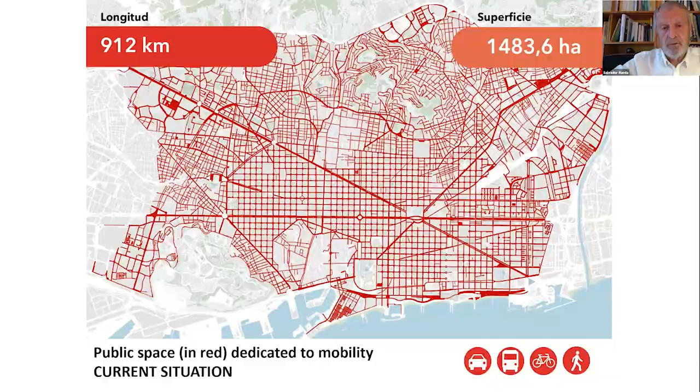This is the proposal approved by the plenary session of Barcelona City Council, based on superblocks, where we will free up practically 70% of the space that today is dedicated to mobility. And we're going to do this without compromising, without putting at risk the functioning and the organization of the city, given that we can free up 70% of the space simply by reducing traffic by just 15%. With 15% less traffic, we achieve similar traffic service in the city to current traffic service. That is, the speeds on these routes in red will be similar to those in the current situation.

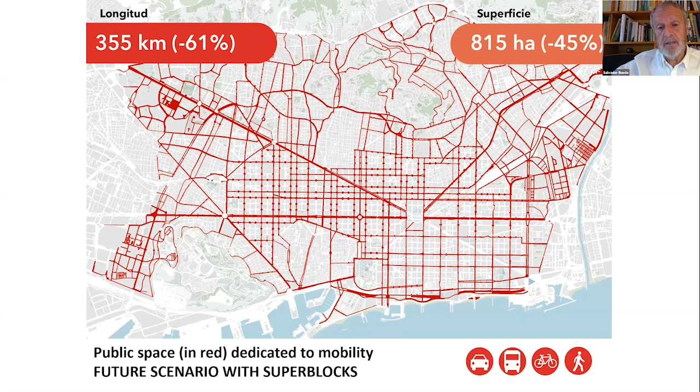So this is the proposal for Barcelona, and as you will see, we will define a similar scenario to transform cities throughout the world, because this is, as far as I can see, the most efficient model known to us at the moment in terms of freeing up space compared to the number of vehicles that you need to reduce to achieve it. Like in Barcelona, a proposal was made in Madrid and was approved by the Committee for the Reconstruction of the City of Madrid during the pandemic. It's a proposal of superblocks that we defined in the Madrid Center project. Within the black lines, you have about 2 million people living.

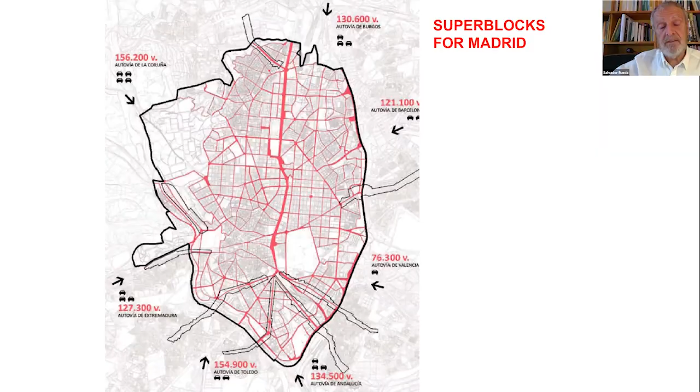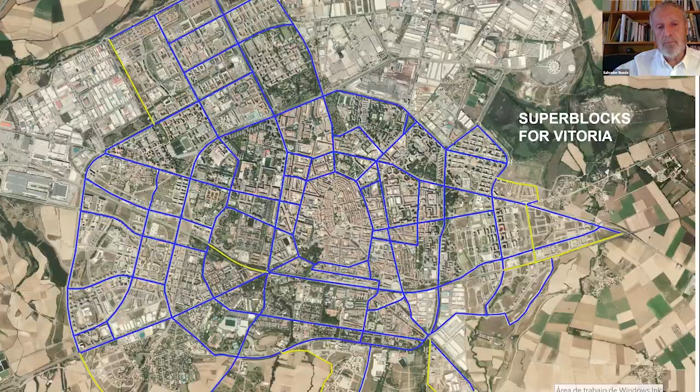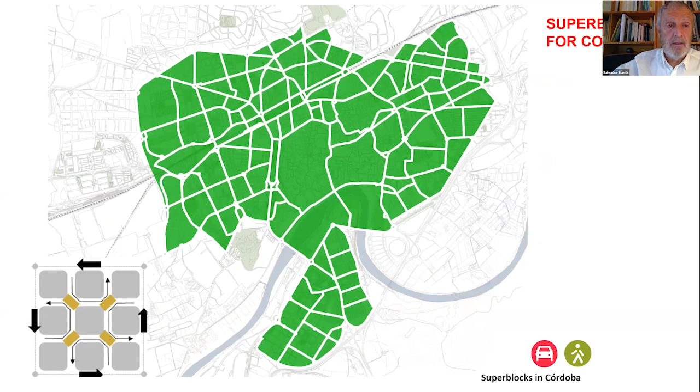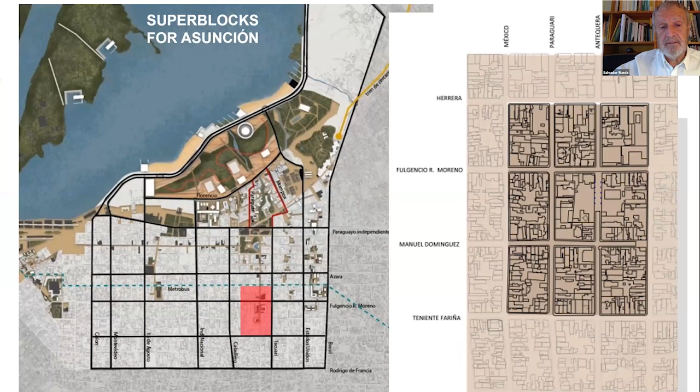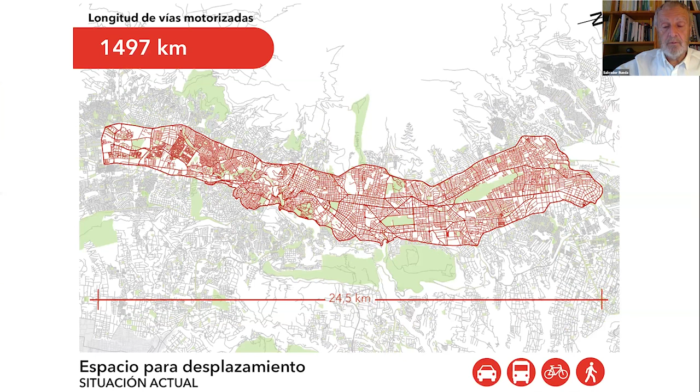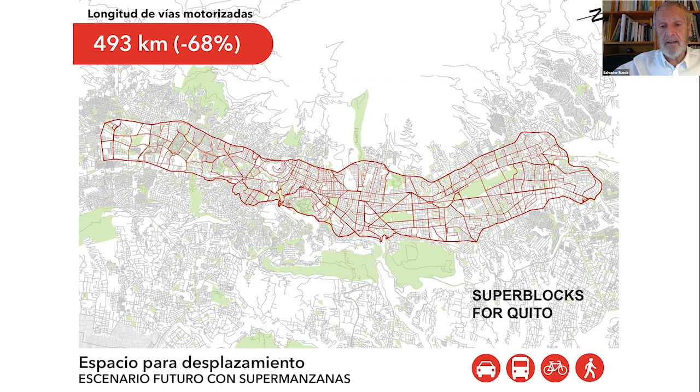So what you can see here are morphology cells that define the different superblocks based on the morphology of each place. In fact, we can talk about superblocks constituting a model. It's a model because it can be repeated in other places in the world, and why not in Wellington? Now we'll see what the aim of this proposal is.

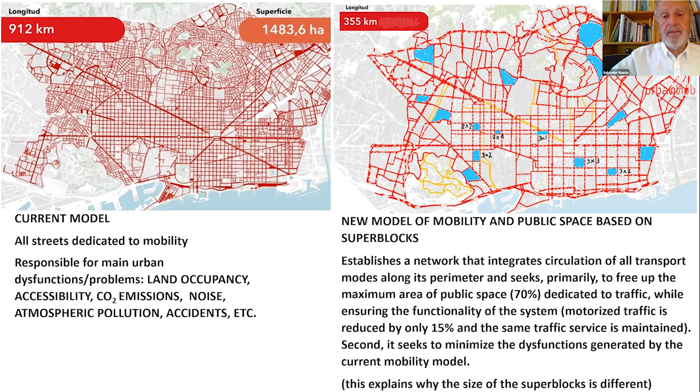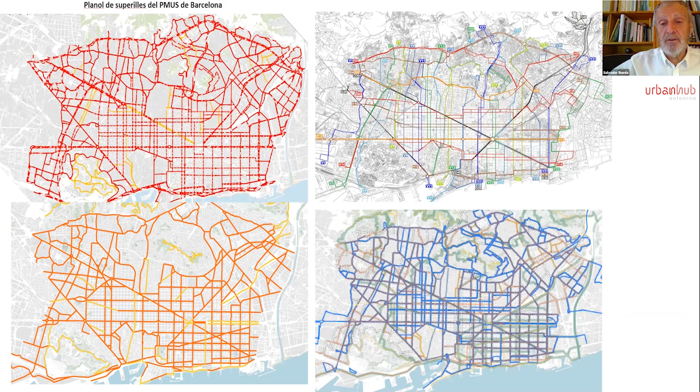So this is the drawing that I did in 2002 for the definition of the new network of buses, the new orthogonal network. This network has already been built. Implementation was completed in 2018. And I can say that I was looking, because I'm also a psychologist, and all my projects first look at how people behave in relation to the proposals that we're putting forward. Here, the idea was, with the same number of buses, to achieve waiting times at bus stops that were as short as possible.

In fact, the human brain begins to have the feeling of waiting when the waiting time exceeds 2 minutes. So under 2 minutes, it's as if you weren't waiting. So we need to look for a network where the frequencies are around 4 minutes, so that the waiting times are 2 minutes, so people don't have the feeling that they're waiting. And this allows you to multiply the number of users of the new network. In fact, before the pandemic, the increase in users was more than 15%, and that's many millions of new users.

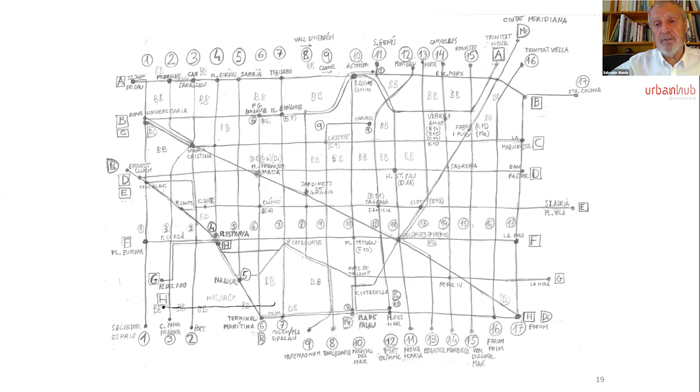In the case of Vitoria-Gasteiz, we implemented the new network with these criteria, and the percentage of new users from 2009 was more than 100% with the new network. And also we have the bicycle network. So we're looking for interconnection, intermodality between modes of transport. When somebody asks me in Barcelona, what is the vehicle of the future for the city of Barcelona? The electric vehicle? I say the electric bicycle. The electric bicycle in a city arrives at its destination before a car when the distances are under 11 kilometers.

So I'll get there more quickly on the bicycle than by car. And the energy I need to reach my destination, to do that journey, is less even than the energy that I'd use to do the journey on foot. So the sum of the metabolic energy plus the energy of the bicycle motor is less than the metabolic energy that I need to do the same journey on foot.

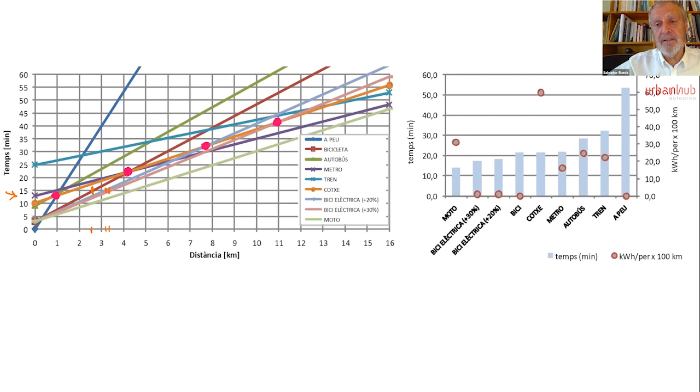The car can't cross the superblock, and that's the key. So you can get to your destination if your destination is inside the superblock, but you cannot cross it. And as a result, 95% of the trips that used to be made in this area just stop happening because the destination is not inside the superblock. So it's stupid to go in, because they're not going to allow you to cross it if your destination isn't inside. On the other hand, pedestrians and cyclists can cross it in both directions.

And there's also a key restriction to all this, which is that the speed inside the superblocks cannot exceed 10 kilometers per hour, to make it compatible with all the uses and rights of citizens. So we're trying to achieve that a blind person could walk along the middle of the street without fear. When we propose mobility solutions at 30 kilometers an hour, that means that out of every 100 accidents between a person on foot and a car, 5 of those people will die. So it's not compatible with the street being used by a child playing with a ball or on a bicycle.

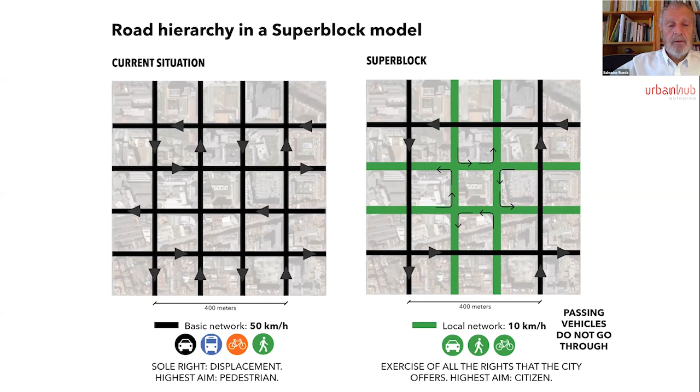As I said, on the left we have the thoroughfares in black for circulation, for movement, in green on the right-hand side for communication. So 70% of the space is freed up for contact between people. But perhaps the most radical thing about the proposal, and when I say radical, I mean going to the root, is that at this moment, the maximum aspiration of planners is to transform urban fabric into pedestrian areas, without realizing that a pedestrian is just another mode of transport.

We're always talking about mobility, but when we talk about transforming public space today, we're still thinking just about mobility. What do we do with bikes? What do we do with pedestrians? What do we do with public transport? What do we do with cars?

And no, what we're proposing is the system on the right-hand side, and that is that in the interior of the superblocks, as well as the right to movement, you can exercise other citizens' rights related to entertainment, leisure, exchange, markets, culture, art, knowledge, and the consideration of public space as an agora, a space in which to develop democracy, democratic expression in all its senses, as well as the right to movement, particularly movement on foot or by bicycle in active modes. This is the arrival of the Superblock proposal.

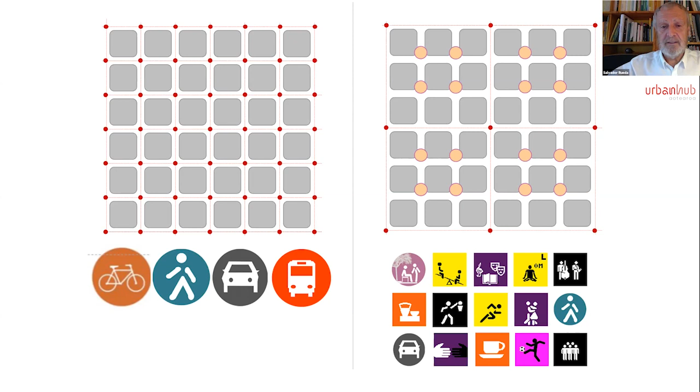So think about where we've come from and look at where we want to get to. This really is the biggest recycling project in the world, because we're freeing up practically 7 million square meters, and without tearing down a single building.

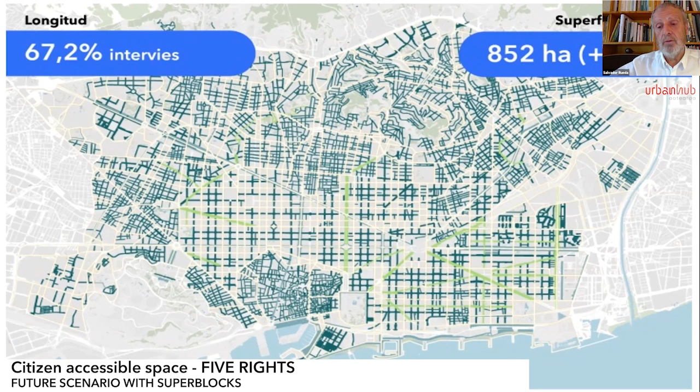Or in the case of Barcelona, these green points that you see on the Cerdà expansion, these are future squares. Today they're intersections, like the ones I showed you before in the first and second photograph, where you see a kind of octagon full of asphalt. But look what we can do if we carry out the Superblock proposal. And I insist, without tearing down a single building, we can achieve 163 new squares like this. You see?

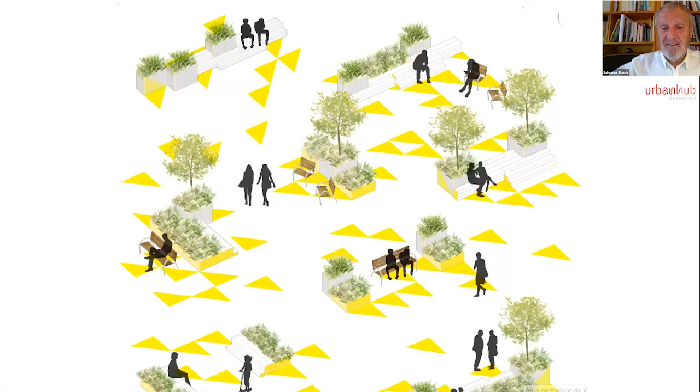That's a living space. It costs very little. These are all recycled materials. It's a 2,000 square meter square, where in a standard superblock you'd have 4 squares of this type. So almost 1 hectare near your home. I mean, it was unthinkable before, a project like the Superblock project. This is another one with a more structural, more finished urbanism, and in the end, you end up with a green network like the one you see here.

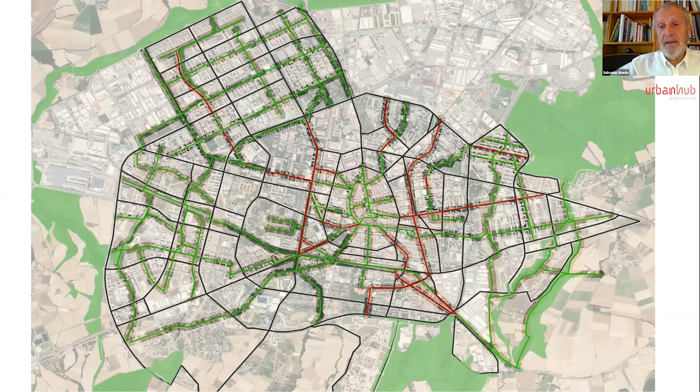In the case of Vitoria-Gasteiz, we have this new network where we're already working on 2/3 of the city to transform it into superblocks. But one of the elements we're looking for, as I put forward in the definition of the model, is improving habitability. So reduction of the dysfunctions that we suffer from the current mobility model.

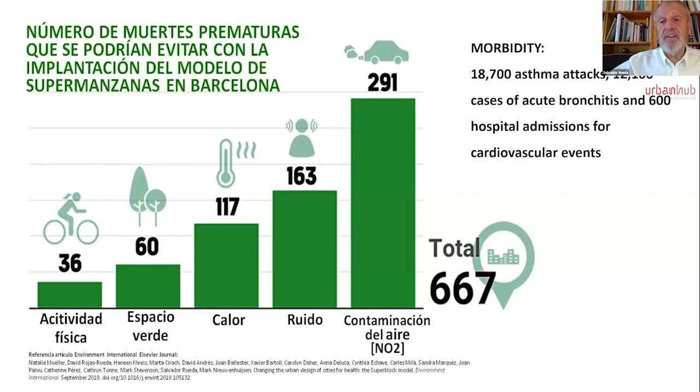So what you see here, you can read this in the Environment International Elsevier journal. This is where we did some research between one of the biggest epidemiological teams in the world, together with different European and American universities, as well as the Urban Ecology Agency of Barcelona. So in Barcelona, we were able to prevent 667 premature deaths just by implementing the Superblock model. That's 291 due to air pollution, 163 due to noise pollution, 117 due to high temperatures, heat, etc.

So it's irresponsible not to put forward projects of this type, because people are dying, and they're not just dying, but there are problems of morbidity, health problems, and these include 18,700 asthma attacks, 12,100 cases of acute bronchitis, 600 admissions to hospital with cardiovascular problems. So all of this could be avoided or prevented with the Superblocks proposal. And in economic terms, we're talking about a saving of 1.7 billion euro.

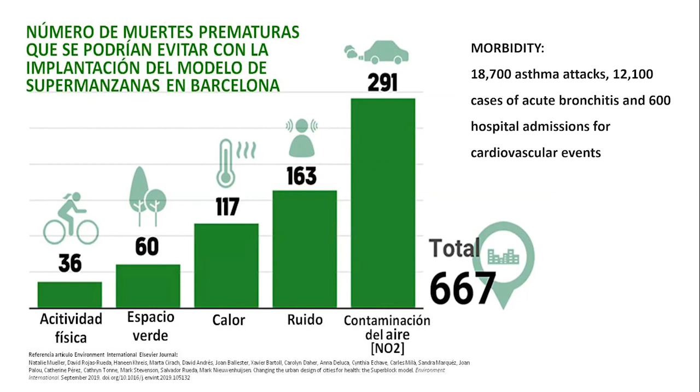Now, with the Superblocks, on the other hand, only 6% would be living in a space with unacceptable air quality, and 94% would not. In the case of noise pollution, it's not quite as spectacular, but the data are similar. In this case, 75% of the population would have noise levels below 65 decibels, which means that two people talking 1 meter apart would be able to communicate 100% of what they're saying in an intelligible manner without needing to raise their voice, without shouting.

And temperatures as well, the heat island effect. At the moment, we have 96 nights with temperatures all night above 20 degrees centigrade, and 21 above 25 degrees. That's insane. Many people die, vulnerable people, the elderly, people with respiratory or cardiovascular problems, and children have severe problems, and some of them die.

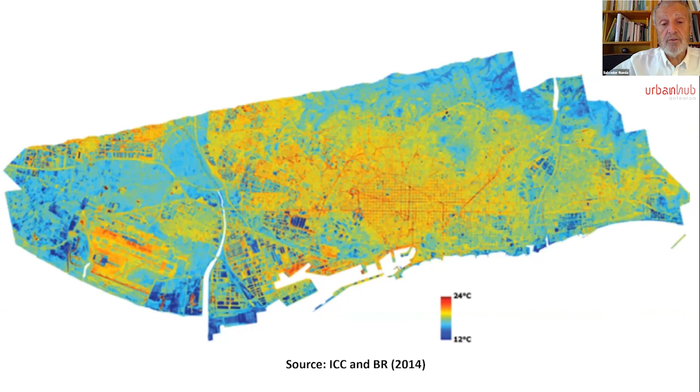So we would develop a green carpet on rooftops, which would allow us to reduce the temperature by between 3 and 4 degrees and reduce the heat island effect. And this increase in temperatures caused by the heat waves due to climate change.

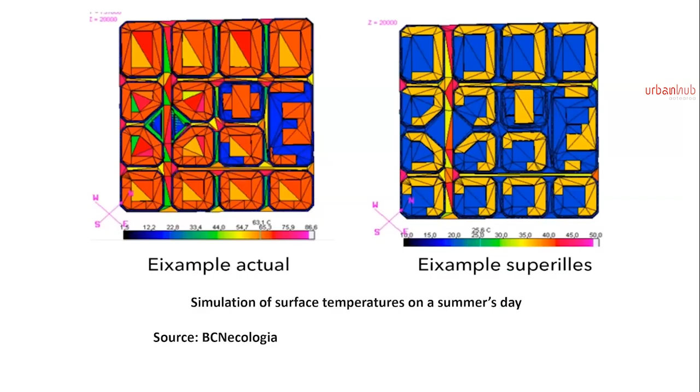This is the simulation. On the left-hand side, we have the current situation. On the right, we have the Superblock situation. So this is the surface temperature of materials. And on the right, with our proposals, in terms of permeability, including several green layers, and this green carpet we were talking about just now, in the end, temperatures will be reduced and the temperature of materials is reduced.

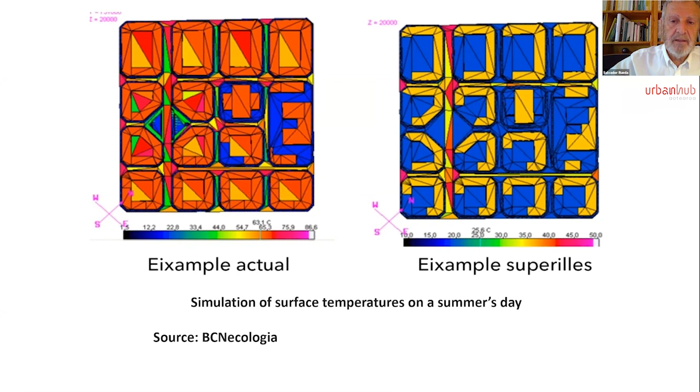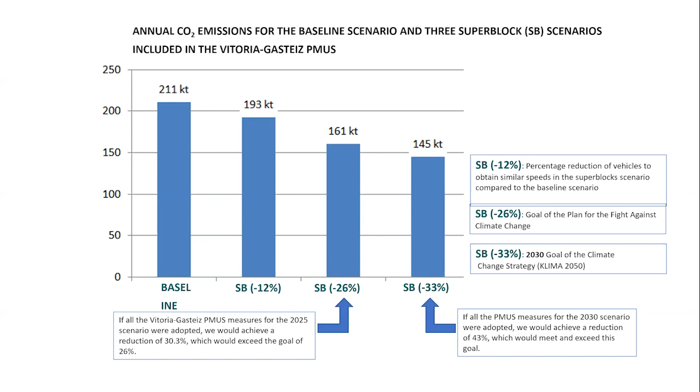Another fundamental element that is part of the Superblock proposal and of the compact and complex city model, which is a model that was approved at the Quito Summit, the UN Habitat Summit. That's a model that, in a way, I proposed, and United Nations has taken it on board. And it's a model of a city that's compact in its morphology, complex in its organization. There's a high mix of uses, and it is also metabolically efficient and socially cohesive.

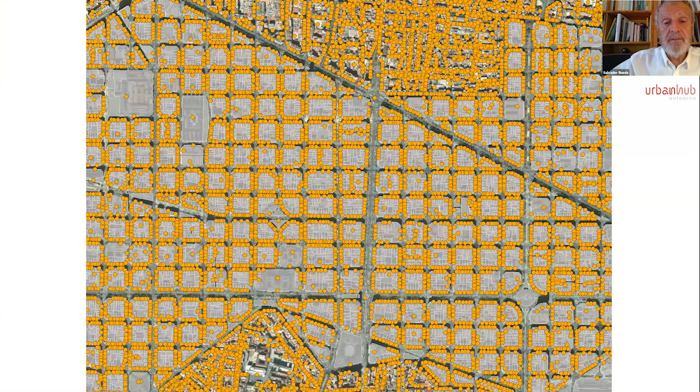And what I'm going to do is transform these orange dots into icons, into ideograms, similar to Japanese or Chinese language. What we're going to achieve here is a message about that area. A message where I can measure the level of information in that message based on information theory. Similar to the way you measure biodiversity, I can measure diversity and therefore the level of complexity of urban organization using that theory. So this is using the Shannon and Weaver formula, which is the measure of entropy, to measure the information contained in the message we talked about just now.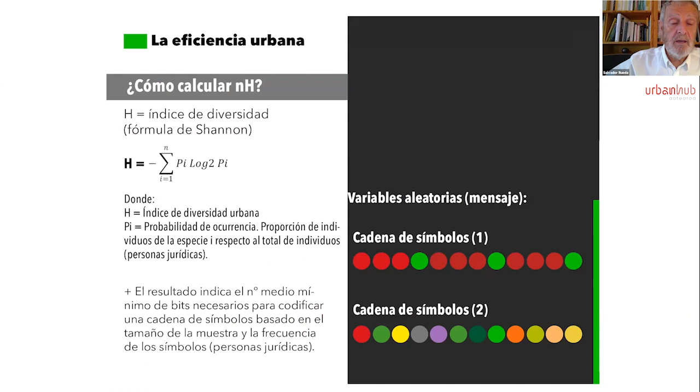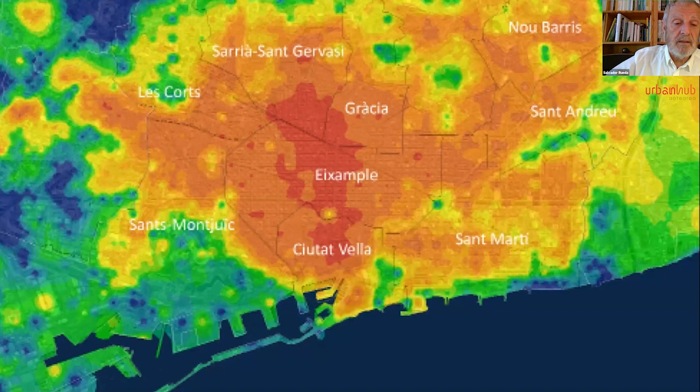And we have developed a dictionary in order to read the city, a dictionary of more than 2,000 words, which allows us to create messages and understand the level of centrality of each piece, the level of maturity, etc. Okay, so this then gets turned into maps like the one you can see here, this map of Barcelona, where you can see the levels of diversity and therefore the levels of organizational complexity and centrality. This is the same, but with density of activities.

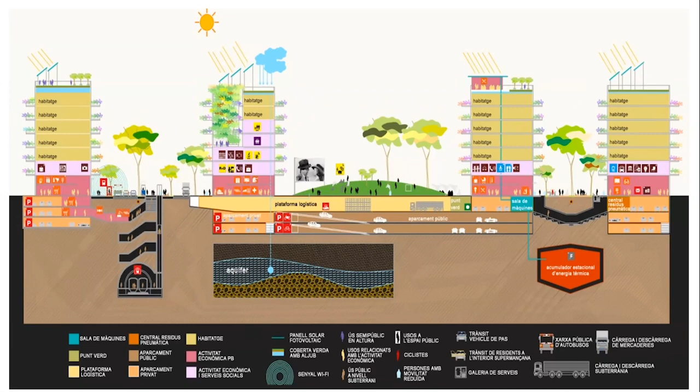In the superblocks, in ecosystemic urbanism, we work on 3 levels: 1, at a height on rooftops, 2, on the surface, and 3, underground. So we need to link all 3 if we want all variables to be integrated, so that we can take on the major challenges facing humanity and to have cities that will be responsible for their current impact.

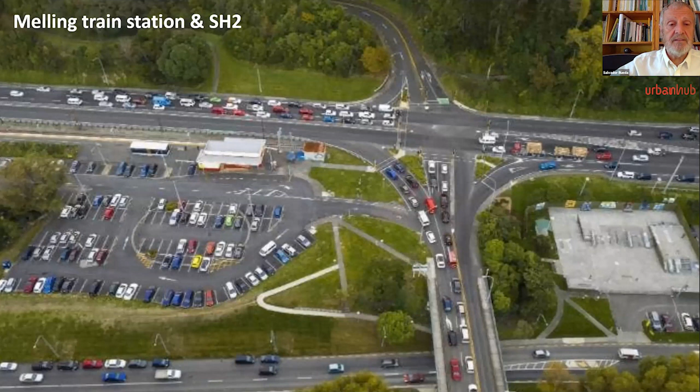That's your reality. It's a different reality to ours in terms of morphology and the functionality of the system, but there are other parts that are more similar to European cities, like the centre of Wellington. And this is what I want you to see. Here you see black lines where the different populated parts of the region approach each other through these two big motorways, which, like a river, becomes filled with content, and the breadth of the river gets increasingly bigger. And of course, where do they end up? Well, they end up naturally in a car park.

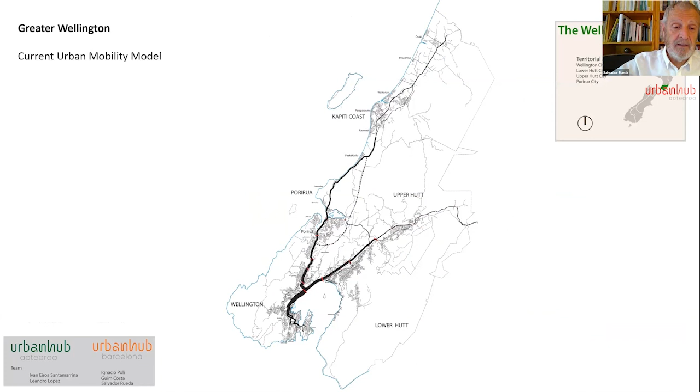So it's very easy to understand the mobility model of Greater Wellington. It's a radial system that is fed by the different urbanized areas, which feed that huge big central trunk, that flow that comes through the two motorways that come together right in the center. As Cerdà said, that is crazy. Cerdà wanted his network to be orthogonal, so that there wasn't a center, so that it was all distributed isomorphically.

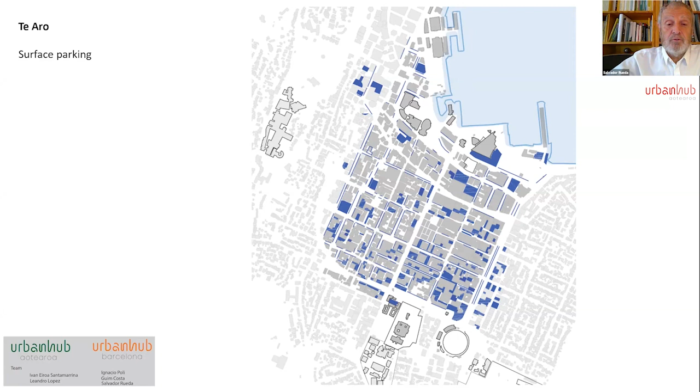As we've just seen, the different tributaries of a river come together, increasing the flow of the river, making it bigger and bigger until it gets to the center. But the paradox is that when it gets to the center, the flow is so big that the center doesn't exist, and that's what you have here. It's just full of cars. We use most of the space in order to park the cars, like a car park. This is the traffic data, and you can see that we have a problem, which is not a small one, in terms of congestion.

So many people just give up, among other reasons, because here, what I've marked in green, this is where you have more than 35 minutes journey time in train. 35 minutes psychologically is the maximum time. As soon as you go over 35 minutes, people are going to choose another form of transport, another alternative mode of transport, and in this case it's normally the car, you see. So in green we have journey times in excess of 35 minutes, in yellow in excess of 25 minutes.

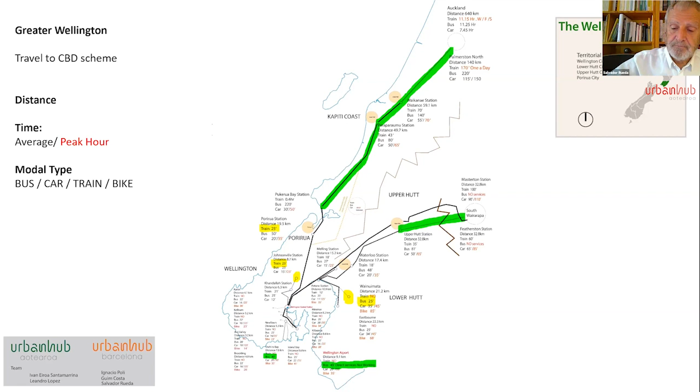So to be able to get to the train station or the bus, they'll take more than 5 minutes from the central station to the destination. So that journey ends up being an hour and a half, or even 2 hours, and that is unacceptable because it really reduces people's quality of life. And this, I think, is something that we just can't do.

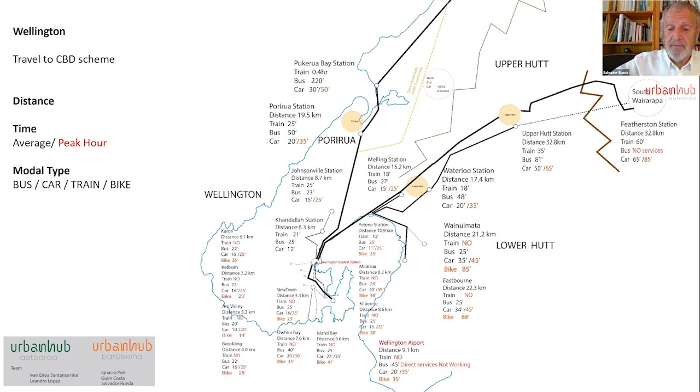In Wellington City, 45%. Now here the numbers have come down, but it's still 45%. Later on, I'll show you the percentages in Barcelona. But on the other hand, public transport and alternative transport modes, so on foot and by bike, it's 44%. 8% work from home, and so they don't need to move. So we have numbers here where the mobility model, understanding the model as the percentage of journeys for every mode of transport, is strongly biased towards the use of the car.

And here you can see it by areas. Again, it's the car setting the pace. It's the car used for the highest percentage of trips. In Barcelona, however, look at the internal movement in Barcelona. 16% of trips are carried out in private cars. Only 16%. 30% is in public transport, and 53% is active mobility, so on foot or by bicycle. In Zone 1 of the metropolitan area, the 26 municipalities nearest to the city, this percentage increases to 31%, and public transport is 19%, active mobility is 50%.

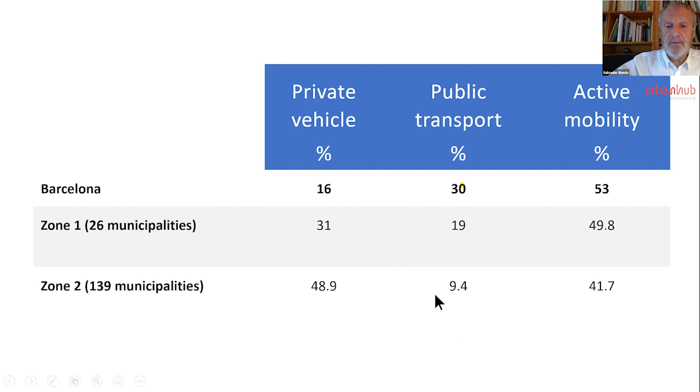Now, when we go to Zone 2, that's 139 municipalities. Now we're getting close. Look at this. We're getting close to similar percentages to those in the case of Wellington. You see? So Zone 2, the suburban area of Barcelona, in the metropolitan area, has similar percentages of journeys to Wellington by car. Public transport looks like this. The values are very similar, as you can see. Perhaps it's even a little bit better for Zone 2, because we're talking about almost 50% in public transport and active mobility.

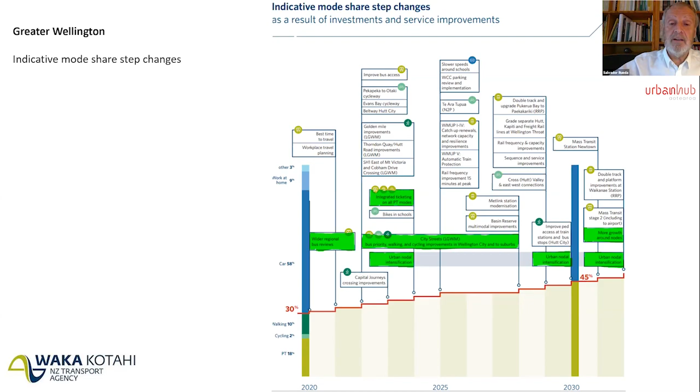But the plan put forward for Greater Wellington, it's very good, because it's talking about the need to densify the nodes, densify the main points of attraction, which are bus stations. So it's looking at fare integration in the different modes of transport. It's looking at reorganizing the transport network, because it's necessary. I think that a lot of work needs to be done to turn the situation around for Greater Wellington. They're going in the right direction here, but I think we need to look for a way to integrate all the parts at the same time, urbanistic parts as well, not just mobility.

So going now into central Wellington, as we saw before, the area, the green area, and the car parking area, so you can see how the space is distributed and what the centre of Wellington is designed for.

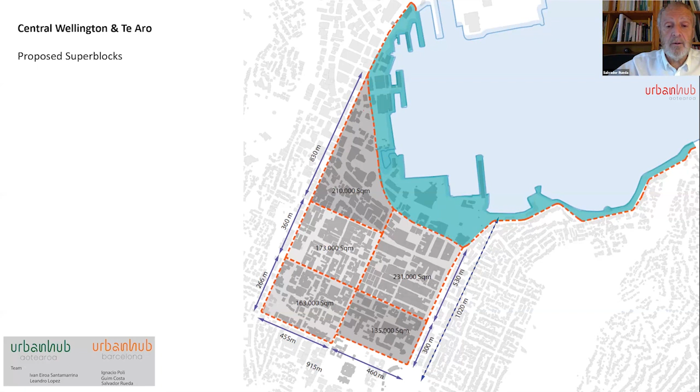I think you can afford this. Now, we have a Superblock proposal that looks like this. So the thoroughfares marked out in red, the perimeter thoroughfares, these would be devoted to traffic circulation, but at 30 kilometers per hour. 30 kilometers per hour along the perimeter. Inside, it would be 10 kilometers per hour, okay? Except for the main arteries, where depending, they would be either 50 kilometers per hour or 80 kilometers an hour.

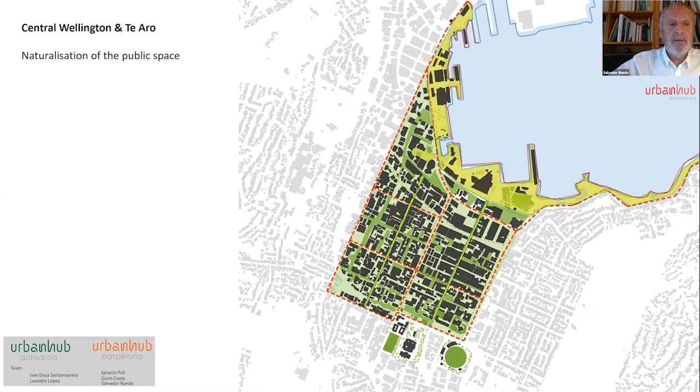This would be the green space that we could achieve. We could regreen nearly all of it. Well, of course we could, if we change the uses of that public space, which is what you have to do. So here you also have a proposal for redensifying the city centre in order to regenerate the fabric that right now is just essentially for commuting, for work, and for shopping on weekends. But for little else. No, you need to create a city, and to do this, we're all agreed that the density is a key element.

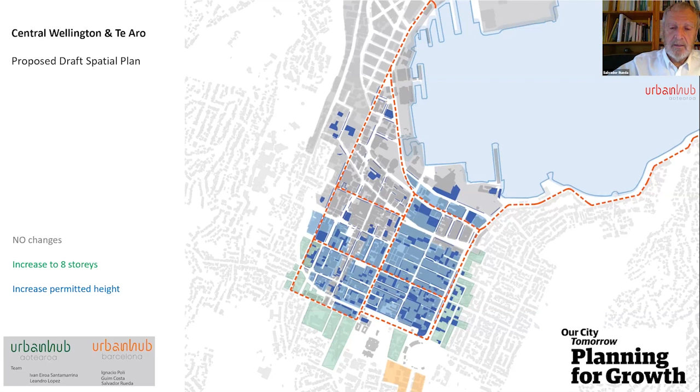We need to study this carefully to see what kind of balance we'd have with the ecosystemic urbanism certificate that we've developed. But it's good. The ideas are going in the right direction, the direction we think is the right direction. Okay. So then here we have partial information on the uses, but we would need to look for greater detail to see how they could be changed, how to multiply the number and diversity of legal entities, of activities in Wellington, particularly in central Wellington, and in the nodes of the different centralities of the different municipalities,

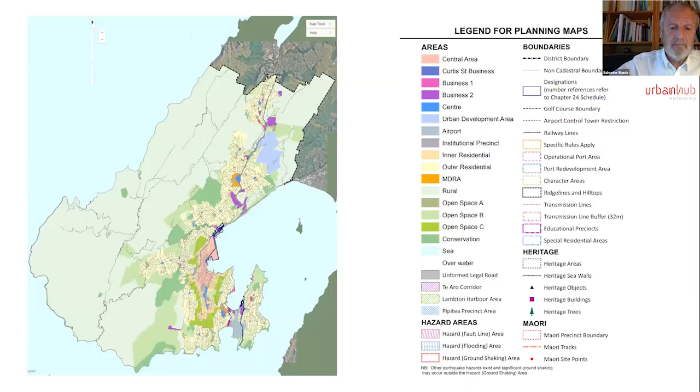in order to come up with a proposal for a territorial model, a potent model of a multi-center territory that would make it possible to reduce the number of journeys, reduce travel times, and to improve urban quality, and above all, the quality of life of the inhabitants of Wellington and the metropolitan area. And that concludes my presentation.